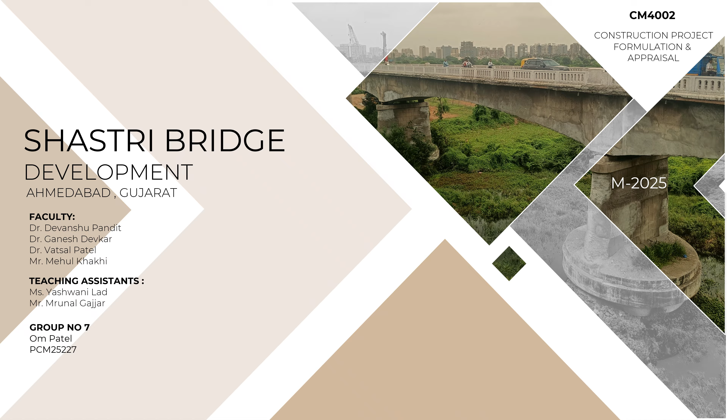Talking about the brief of the project, the bridge in Ahmedabad serves an important infrastructure element, playing a significant role in the city's connectivity, economy, and urban development. This bridge spans across the Sabarmati River, connecting the Sarkhej Narol corridor of Ahmedabad, and it consists of National Highway 47, which is the key connection with Vadodara and Rajkot city.

This project is a brownfield project, and the existing length of the bridge is 555 meters, which is a major bridge. The client is the National Highway Authority of India. The bridge serves daily mixed traffic movement and is the main connection to industrial areas of Ahmedabad like Vatwa, Narol and Pirana. Over the years, the existing four-lane bridge has been addressing traffic congestion and the deteriorating condition of main structural components like girders, bearings, and the main carriageway.

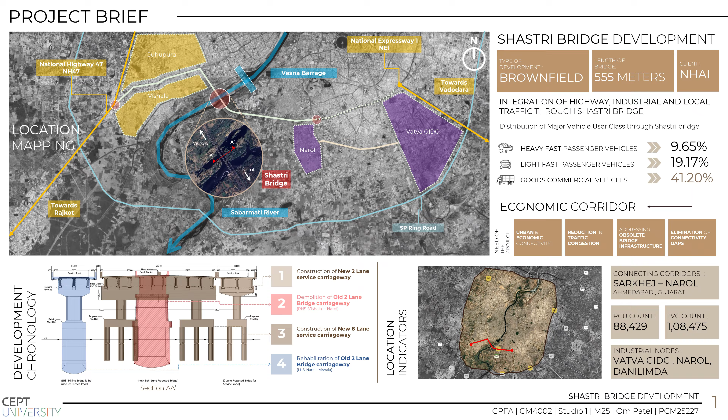To achieve smooth traffic flow and safe movement of vehicles, upgradation and development of this bridge is required. The development of the bridge consists of an 8 plus 2 lane new bridge, demolition of the existing right hand side 2-lane bridge, and rehabilitation of the existing LHS 2-lane bridge.

Now looking to the design brief for this project. In the design brief, all components of structure, mechanical, utility and fixtures design brief are given and specified as per the IRC codes and standard documents.

For the key features of the bridge, the proposed length of the bridge is 555 meters, which is based on the plain terrain and Sabarmati River. The existing carriageway consists of four-lane separate carriageways, and the new bridge proposal is an eight-lane divided carriageway with two new two-lane service carriageways.

Considering the structural component, specified concrete grades are to be used for each different component as mentioned in this brief.

For the superstructure, planned with PSC girders, which is either box girder or I-girder, and for that durable materials measures are to be considered, with corrosion inhibitor concrete to be used.

Talking about the general brief, the design life for the bridge is considered as 100 years, and this bridge is designed for 88,429 PCU count.

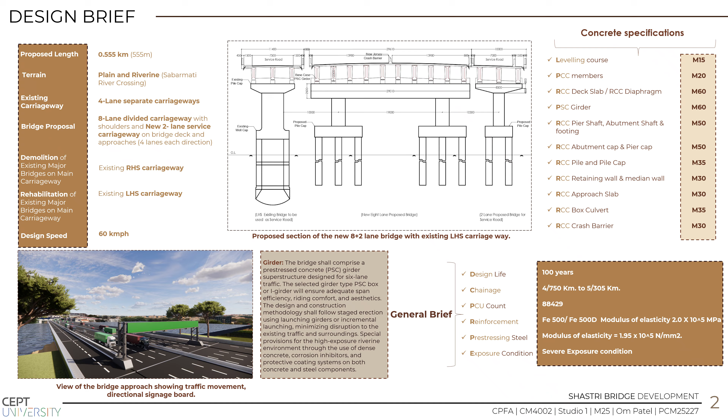For the superstructure and substructure, loads and forces carried out for this brief: dead load considered for pre-stressed concrete is 2.5 ton per m3. Superimposed load for the wearing coat thickness of 65 mm is considered. For live load of carriageway, one lane of 70R for every two lanes is considered.

For the temperature force, IRC manual clause number 215 is followed, and this bridge is considered as seismic zone 3 for seismic force and wind force. The IRC manual SP114 2018 is to be followed.

Now considering the mechanical brief, the components bearing and expansion joint are considered. For bearing, pot PTFE bearing is to be considered for the provision, and the clause for loading and load structure IRC 6 2017 is to be followed.

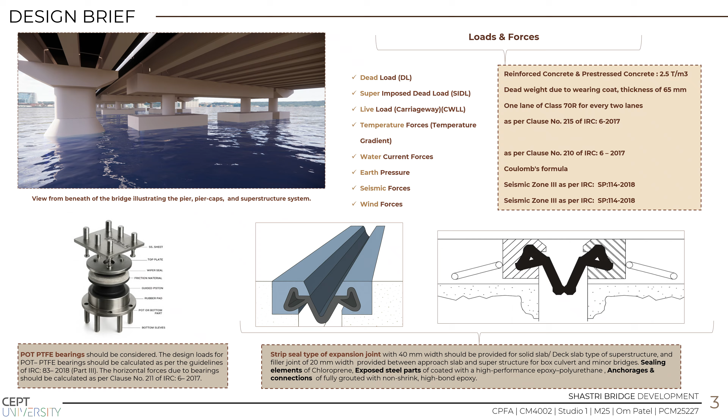For expansion joint, a strip seal type of expansion joint with 40 mm width is considered.

Design brief for the traffic signage, drainage, street light, and inspection platform specification is given. For traffic signage, two numbers of retroreflective rectangular informatory signboards of size 900 by 600 mm should be provided in accordance with IRC SP 84 2019 and IRC 67 2012. This signage layout has to be designed in accordance with IRC 67, which is the Code of Practice for Road Signs, and IRC 99 guidelines for installation of road traffic signals.

And for the drainage, open inlet gullies and scuppers are proposed, and they should be placed at 10 meters center to center distance, and the connection is done with HDPE PVC down pipes.

For street lights, a solar LED hybrid system is adopted, and this LED hybrid system will ensure energy efficiency and operational reliability with average 40 lux illumination. And for lighting, poles should be installed at 30 to 40-meter intervals with high mast lighting at bridge approaches.

Inspection platform. An inspection platform is proposed to maintain and inspect the girder and the bearing during the maintenance period, which gives easy access to girder and bearings. This inspection platform consists of a fixed ladder with safety cage, walkway with handrails, and landing platform that should provide secure access from the deck.

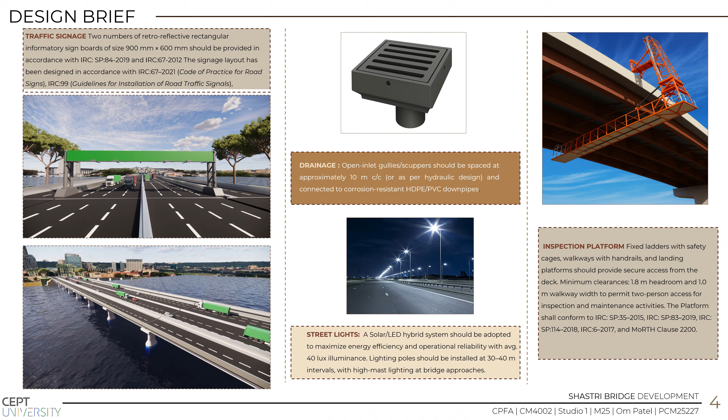Minimum clearance of 1.8-meter headroom and 1.0-meter walkway width to permit two-person access during the maintenance.

Coming to the sustainability proposal for the project, use of materials with low embodied carbon, which is sustainable infrastructure development under the Green Highway policies. Adoption of UHPFRC girder can reduce embodied carbon generation by 44.8% compared to normal PSC girders.

By comparing life cycle cost, UHPC concrete can give us 100 years of design life with superior techno-economical value and sustainability benefits, which justifies the initial cost of the UHPC concrete.

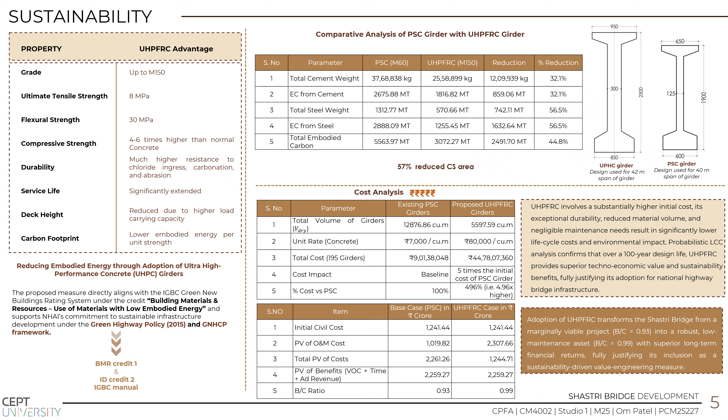Other sustainability measures for the project as per the IGBC and Green Highway policies are water conservation strategies. Adopting UHPC concrete can use 30% less water compared to high strength concrete.

Considering another parameter, demolition waste management, by which demolition of the old two-lane bridge, 13,466 of recycled concrete aggregate can be generated. This recycled concrete aggregate will be used for new construction as per the reuse strategy as per IRC 121 2017.

Now adoption of a structural health monitoring system and advanced traffic management system, which will be sustainable measures for innovation and development by the IGBC manual.

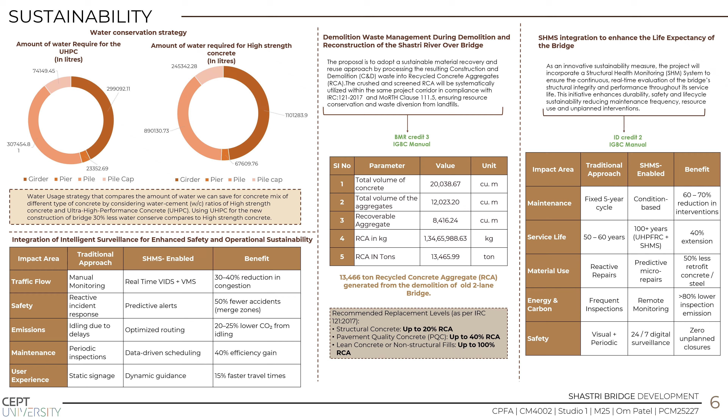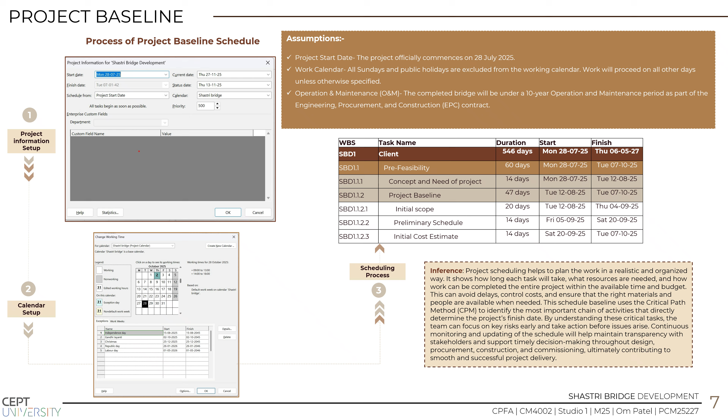Operation and maintenance is to start after the completion of the construction period, and a 10-year operation and maintenance period is carried out for the EPC contract. Using MS Project, the whole schedule is prepared, and total duration for the project, including operation and maintenance, is 5077 days.

Construction period is 917 days, and the client is involved for 546 days for pre-feasibility, procurement of services and internal approval for the project. From that, milestone tasks are prepared, in which pre-feasibility, procurement of services, preparation of inception report, and preparation of DPR are the milestone tasks.

And in construction, pre-construction mobilization, construction of two-lane bridge, demolition of LHS bridge, eight-lane bridge, and rehabilitation of RHS bridge. These are the milestone tasks for the construction part for the EPC contractor. The milestone schedule gives the picture of the whole project and the long-term operation of the project.

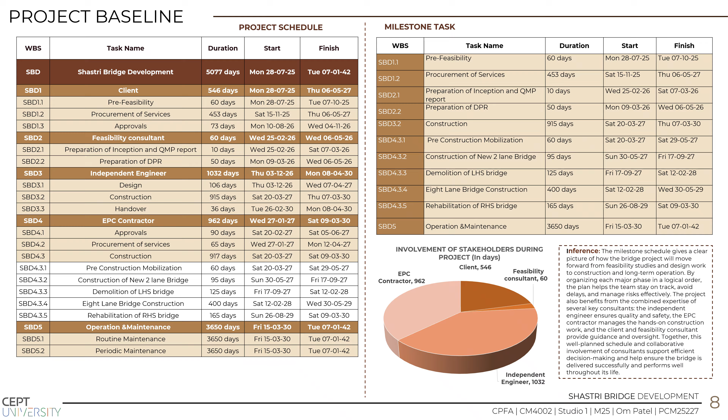Now coming to the conclusion. For design brief highlights, the client must deliver clear and comprehensive design briefs to the consultant, and a well-structured design brief which considers the structural requirements, utilities, fixtures and mechanical systems forms a foundational reference for all downstream engineering activities.

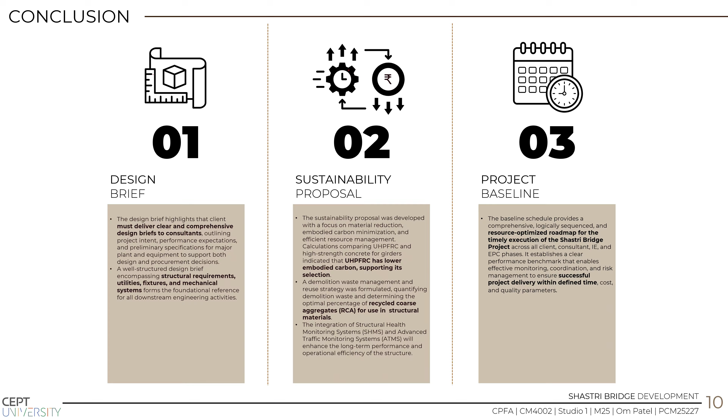For the sustainability proposal, adoption of UHPFRC girder minimizes the embodied carbon, and the demolition waste reuse strategy will be a sustainable advantage for the project. And coming to project baseline, the baseline schedule provides a clear idea about the project, which helps in complete and successful delivery of the project in defined time.